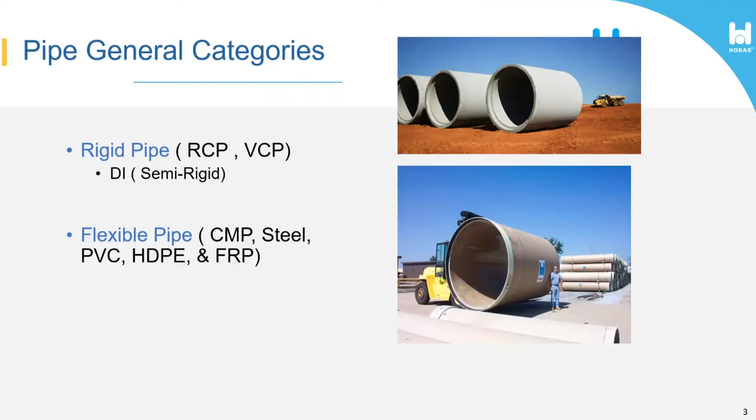It's an interesting concept, what some people think is flexible and what other people think is rigid. I got into a very good discussion with the Corps of Engineers group down in New Orleans when they were welding some 84-inch steel pipe for a pump station, to take all the rainwater and pump it over the levee.

They didn't want to entertain fiberglass pipe because it was flexible. But when you looked at this big 84-inch steel pipe with all these stalls in them that kept the pipe from collapsing on itself, because it was super flexible pipe - it was about an 8 pipe stiffness when you looked at the wall thickness and its modulus. So it was maybe 5 times as flexible as fiberglass was, but they didn't view steel as flexible, and they viewed fiberglass pipe as flexible. It's still an issue working with the Corps of Engineers in New Orleans.

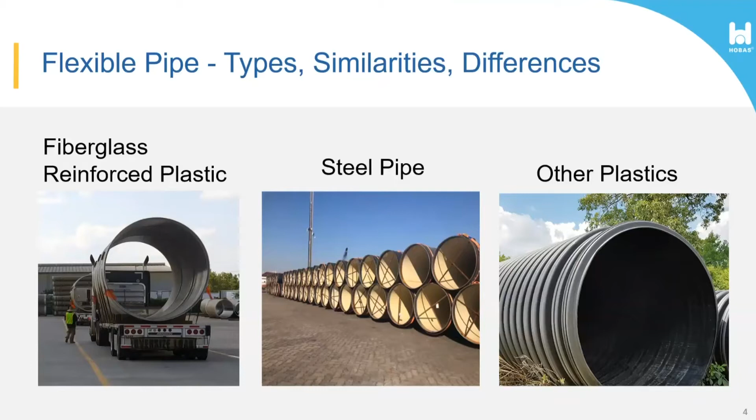But that's just what we want to address. There's all types of pipe, but the installation practices and how the pipe itself performs are unique to themselves.

Kim's going to touch a lot about what we do to understand our pipe in such a way that we can help you install it correctly and understand what affects our pipe, what you do in the field, what design engineers can do that affect the overall installation, and how we can address this as a team to get a successful result of the project for everybody involved.

We're going to talk a little bit about the intended use of flexible pipes, the different installation methods, because they do have different criteria that need to be addressed. And it all starts with proper pipe design.

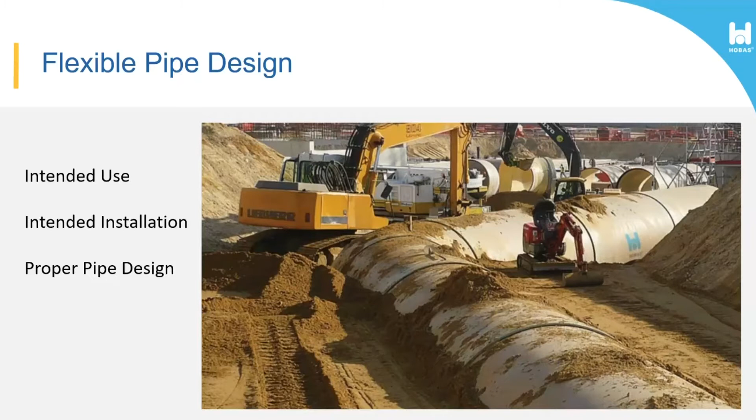Is the pipe designed to do what you're trying to do with it in the field, or can it be modified for what you're trying to do with it in the field based on depth, based on soil types, based on the equipment they're using to put it in the ground? All those things we're going to touch base on, and they all revolve back to: if the pipe is designed correctly and it's installed per that design, then you're going to have a good result.

And that's where Kim's going to come in and talk about all the governing regulations that help us as a pipe manufacturer, and the owner and the design engineer, understand more about the pipe and what should and shouldn't be done with it. So Kim, if you'll take over from here, I'll keep forwarding on.

Sure, great. Thank you, John. I'm going to cover the next section regarding standards, pipe performance, and testing.

As John and Joe said, my background is in fiberglass pipes with 30 years experience relating to product design and performance. And although I'm referring to fiberglass a lot in this example, flexible conduit theory is applicable to a wide range of non-rigid products.

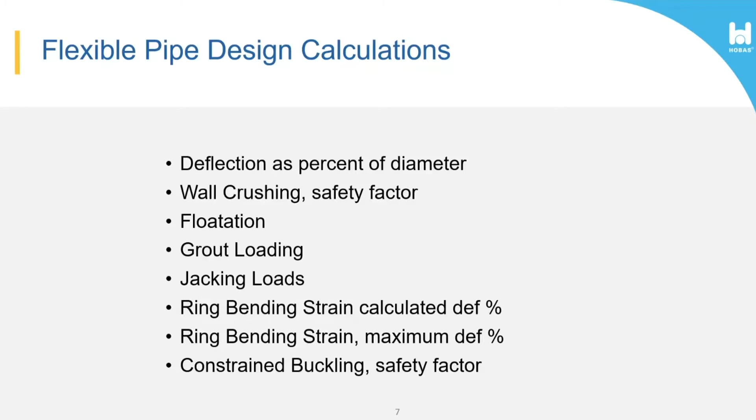This looks a little bit complicated, but this deflection is the chief area of concern for most owners and engineers and obviously contractors during installation. And this depends on the pipe's stiffness. However, how the pipe stiffness affects product performance is very often misunderstood. If a pipe is over deflected in the field, and I mean any flexible pipe, whether it's fiberglass, PVC, or HDPE, the first question is not what's the pipe stiffness, but what's the support provided to the pipe.

So let me explain that a little bit more. When the pipe is installed in the ground, all flexible pipes undergo deflection, and the amount of deflection is a function of a lot of things: the soil load, the live load, the native soil characteristics of the pipe zone, the embedment materials and their compacted density, the trench width, haunching, all of these things, including the pipe stiffness.

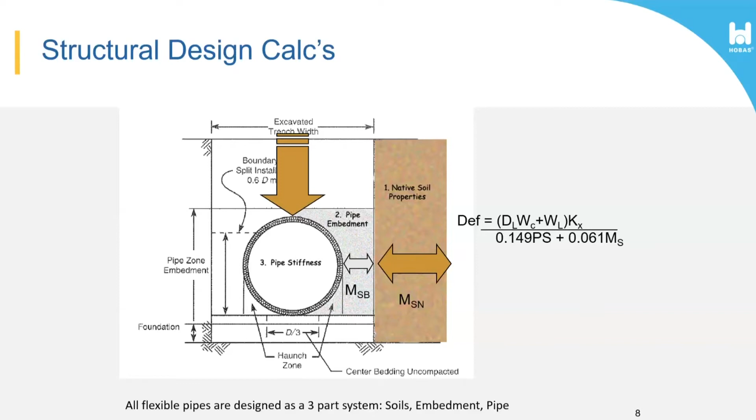So again, the formula for deflection has two factors in this denominator, one being pipe stiffness and the other combined modulus. For our typical installation, the pipe stiffness times its factor ranges from about 3 to 11. So this 0.149 times pipe stiffness gets you these ranges you see here: 18, 36, 46, 72, which gives you this factor of 3, 5, 7, or 11. That's the contribution to this bottom portion of the denominator by the pipe.

This right chart is showing you the contribution from the soil modulus. So depending on the installation type, the soil conditions you have, how many blows per foot in the case of granular materials, you have a corresponding modulus, M sub S, and this factor, 0.061 times M sub S, gives you values that range from about 3 to 180. So the magnitude of the soil component is far greater than the magnitude of pipe stiffness. This means that increasing the pipe stiffness to combat deflection is not as effective as improving the embedment.

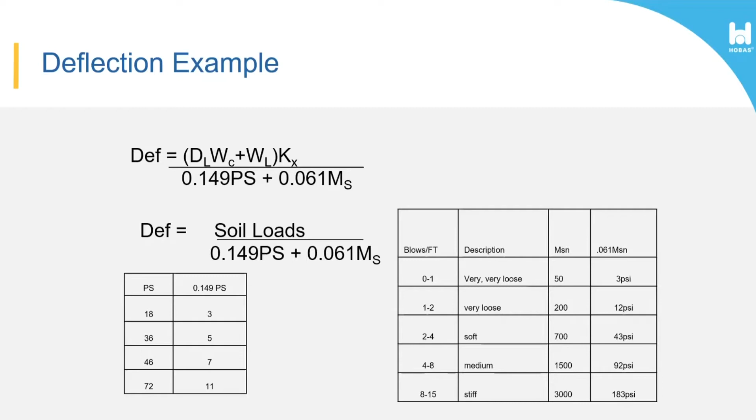And we get this a lot. If we see installations that have deflections a little higher than we had predicted, they say, well, can we just make the pipe stiffer? Not really. The most effective way to correct this installation is to increase the embedment. Go ahead to the next slide, John.

So there are lots of other calculations that are verified as well. Flexible pipes are checked for all of these performance criteria, and appropriate safety factors are applied. In addition to deflection, we check wall crushing, buckling resistance, and then when the pipe does deflect, it causes strain in the pipe wall. This is something I'm going to talk more about later in upcoming slides regarding particularly the behavior of this strain on the product.

So in order for a pipe manufacturer to accurately predict the performance of the pipe, information about the actual installation is crucial. This includes cover depth, location of the water table, any other loads applied like live loads, and the support to the pipe. In a direct bury application, this would be the combined soil modulus, which is the combined support produced by both the native and embedment materials.

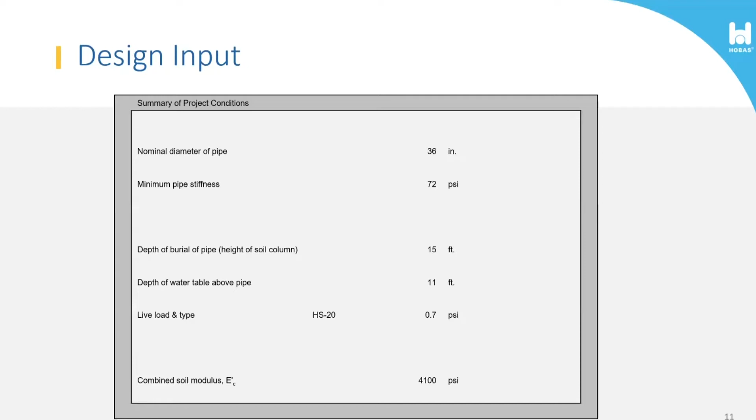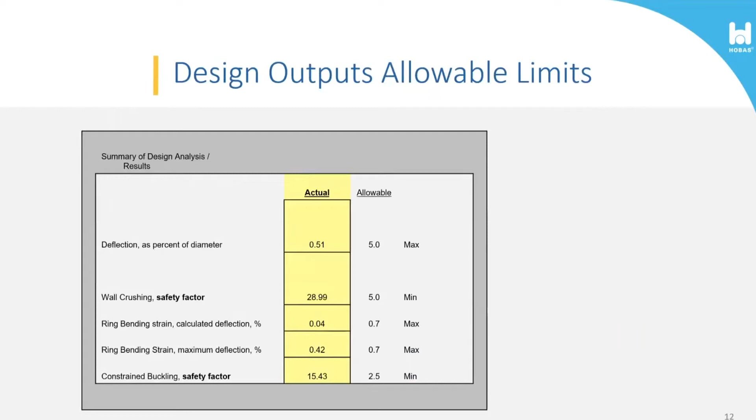And then the predicted reaction can be compared to the allowable limits. Here is a summary of an analysis with the predicted performance versus the allowable limits.

And this is a stiffness test. The pipe production is sampled and tested in accordance with ASTM standards, and we perform a variety of tests depending on the application. Test results are always available from us, including stiffness and deflection characteristics, as well as mechanical properties such as tensile or compression.

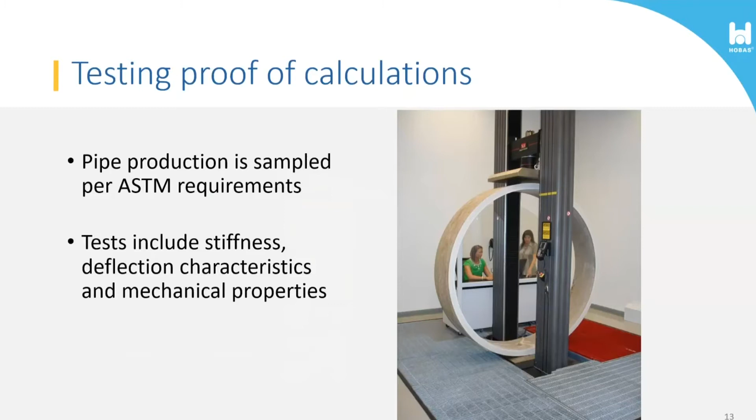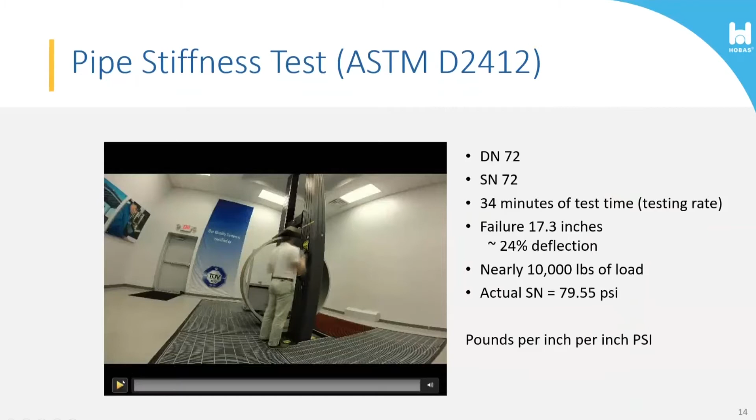On the next slide, we have a short clip of an actual stiffness test. This particular test, a 72-inch pipe stiffness test, would take about half an hour, so we sped it up to complete in about 30 seconds. In about 20 seconds in, you'll see the failure occur on the top portion of the pipe.

Right there, we see the failure. Sorry, clicked the wrong button. That's okay, you can play it one more time so that we can see it.

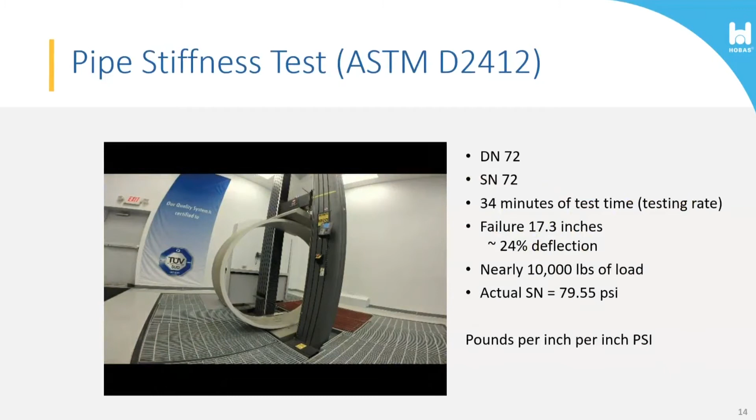In this case, the deflection reached over 24%, which is well in excess of that 5% limit. So you can see this pipe is actually very flexible, even though the total load at failure for this particular pipe was over 10,000 pounds.

As discussed earlier, the load carrying capability of the pipe alone is much less than the combined carrying capability of the pipe-soil system.

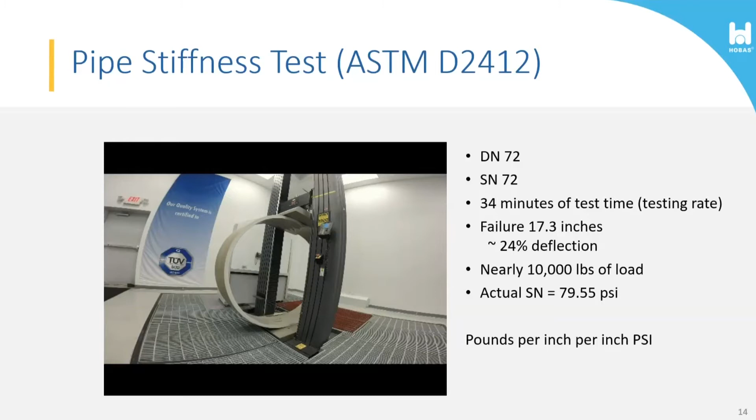It's very important to recognize that for that pipe to deflect in the vertical direction and actually get shorter, it has to get wider. In this test, there's no side support, and the huge difference to what we have in an installed condition in the field is it does have side support. So it can withstand that load without going into a deflected state, based upon how much side support there is on the pipe.

So in addition to the short-term tests like the stiffness test we just saw, many performance limits are determined at extended periods through statistical extrapolation of data obtained from long-term tests under similar conditions.

One test is the ASTM standard for strain corrosion, shown in this picture here. This test was first published by ASTM in 1978, and it requires that a minimum of 18 specimens are set at various strain levels over more than a one-year test duration.

The strain corrosion testing was done per the sanitary sewer specifications in 1 normal sulfuric acid, which mimics a very corrosive sanitary sewer. These accelerated tests continue for a minimum of 10,000 hours per the standard, and this is the basis by which fiberglass pipes have been shown to have a design life of 150 years.

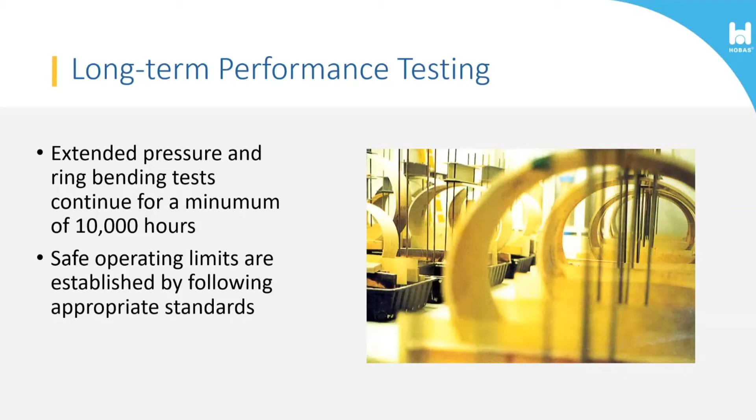Some tests have been running here in Houston in my lab for over 27 years. And globally, we have pipes that have been in this test environment for 40 years.

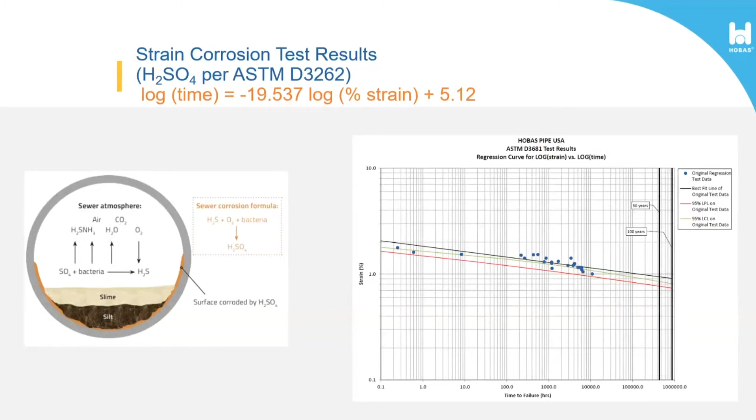Yes. Just to give an introduction as to why flexible pipes are being used more than rigid pipes now, there are other things that have to be considered with installations on flexible pipe. But pipes like PVC, fiberglass, and other plastics are resistant to the things that make pipes deteriorate quickly.

I can't think of hardly any customers still using bare concrete pipe or even lined concrete pipe in sanitary sewer environments, because it just doesn't last very long. So they're willing to incur some additional installation costs for flexible pipe because they get so much more life out of the system. In today's environment, with the economy what it is and budgets what they are, the more life they can get out of a system for the same dollars, or even a few more dollars on bid day, if that system lasts 2, 3, 4 times longer than a conventional system, it's money well spent.

We've enjoyed the marketplace. We're growing along with all the other materials. For those of you trying to find materials to buy and put in the ground, everybody has been slammed with demands to produce more pipe faster and get it to the job site.

I want to talk a little bit about installations. Joe brought up my history - I've loved utility construction for a long time, been in it for a long time. I've seen pipes like those shown on the left installed very shallow, which have their own criteria of concern for loading, flotation, and other things that happen with flexible pipe that shallow. I've seen this pipe and other flexible pipes installed 200-300 feet deep inside tunnels.

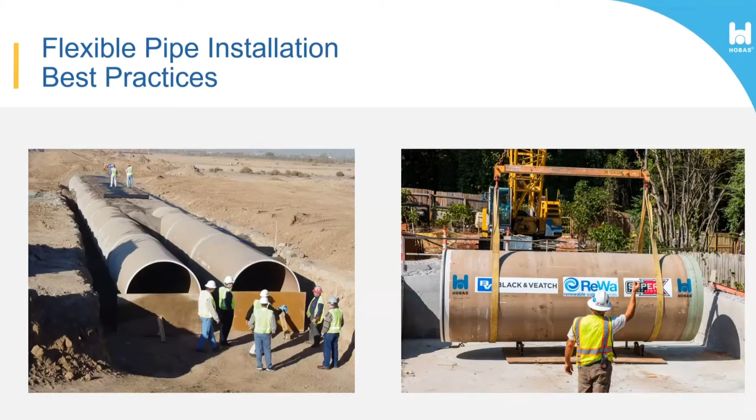I'm going to talk a little bit about inspection when pipe shows up on your job site, what to look for - whether it's ours or anybody else's - how to handle it, how to store it safely, then really getting into the meat of things on direct bury installations themselves, on what really needs to be focused on to assure a good installation.

As time allows, we can get into two-pass tunneling, slip lining, other parts of flexible pipe that are used quite often, but in what we've seen in the industry, maybe 85 or 90% of our business is in direct bury new construction. The rest is split between slip line applications to renew aging infrastructure and direct jack tunnels - that's the method needed to get the pipe in the ground without tearing up everything on top of the ground that's in the way.

So we'll talk a little bit about good practices to put in, the pitfalls you might see that you need to watch out for, some of the damage that could happen to pipe and how to recognize that, hopefully, and to prevent it, or if and when it does happen, how to repair it. Then we'll have some time at the end for questions and answers.

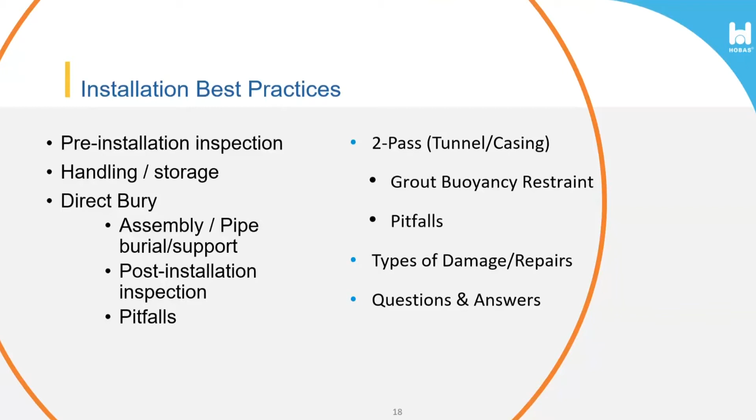So just a brief minute on the transfer of the product. When the manufacturing plant produces a product, it's in our control, it's inspected, it's tested to make sure that it exceeds all the standards it needs to be. For us, if our pipe is stamped 46 stiffness, it's over 46 stiffness, or if it's stamped 155 ton for jacking pipe, it exceeds that by a vast amount, because we don't want to ship anything to your job site that doesn't exceed the requirements for that job site.

So when it leaves our factory and goes on the back of a truck, and that truck driver straps it down, that is literally his pipe at that point.

It's no longer in our control. Whether he's driving 2 hours up to Dallas or 3 days to California, the trucker is in charge of that pipe, and things could happen to it along the way.

We get calls and photographs, not as frequently as we used to, which I think is a good thing. I think truckers are taking more care of the pipe, but if they don't strap it down right—especially like this picture where pipe is on a drop deck trailer—if it's constantly sliding up and hitting that metal deck in front of it, they could damage the end of the pipe. That could cause sealing issues if you don't catch it when it shows up on the job site. Randy Whidden, our field service manager, gave me quite a few slides to talk about what to look for in the field as a contractor building your project.

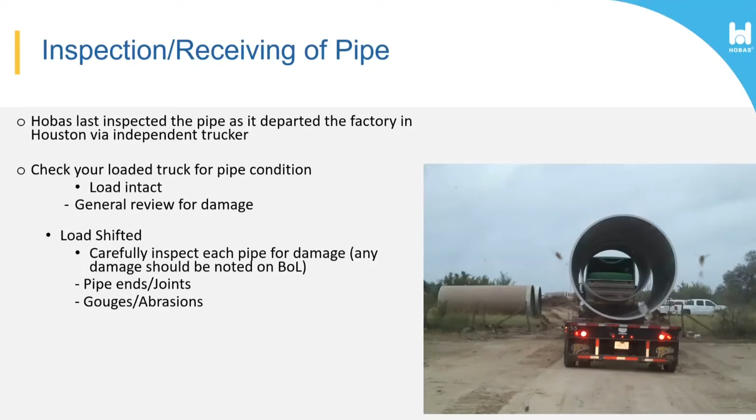Then as you pick it up to install it in the ground, you go, oh, by the way, I forgot to tell you that pipe was damaged when it came off the truck. Then the trucking company starts arguing, well, I don't have anything on my bill of lading, and you probably dropped it, and it just gets into a whole mess that we'd all rather avoid. So just be good stewards of the pipe, because when you take it, it's yours.

So nobody likes to see that. Just be careful with it. Handle it correctly—it is flexible. It's kind of hard to describe, because if you took a section of this pipe and cut it into blocks, you'd swear they were bricks and couldn't bend them, because it's a very, very stiff, flexible pipe. Especially as the walls get bigger, or you get into jacking pipe, but it's still flexible. It's still made of plastic, and it's still reinforced with fiberglass.

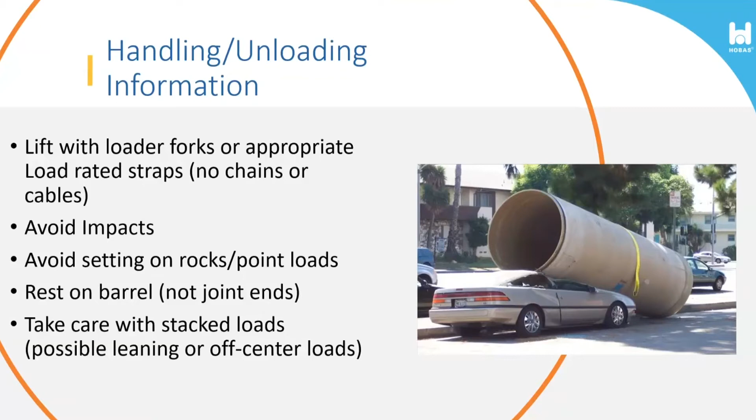I've seen a lot of pictures of job sites where the contractors, as they're excavating the trench, throw some dirt over and make a little mound, one here and one here, and set the pipe on a small mound of dirt, so that there's an airspace in between that allows them to get the straps around the pipe a little bit better.

So just common sense handling and safety issues. I know a lot of you have installed our pipe and other flexible pipes, so this may be old hat, but for those of you that haven't, it just needs a little bit of extra care.

Short-term and long-term storage. Short-term's easy - get it off the truck, get it in the ground as fast as you can, and it's not an issue. Longer-term storage is where you're storing pipe on the ground for 6 months, 12 months, a year or longer.

The exterior of the pipe is resistant to UV damage because it has a sand layer on the outside. But the interior of the pipe is not protected, so we don't want sunshine coming into the end of that pipe for long periods of time, because it will literally sublimate that resin and cause it to evaporate over time. If you've ever seen a fiberglass tank that hasn't been painted, sitting out in the sun for a long time, it gets fuzzy - that's because the sun has been working on that resin, turning it into a gas, and it's evaporated over time, leaving the glass exposed.

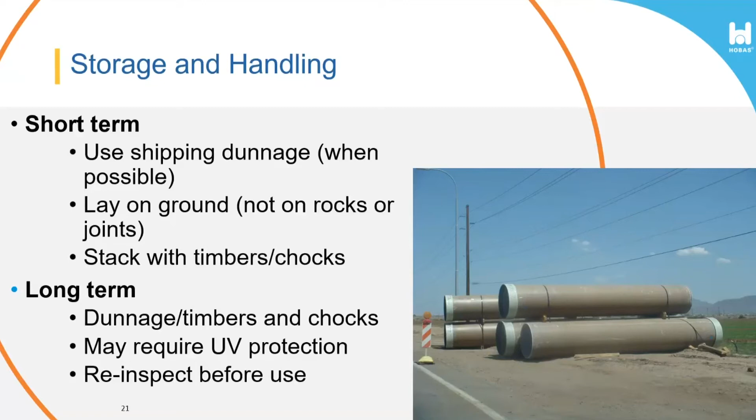And being in Tennessee and Kentucky, I couldn't resist bringing up a little racing.

One of the purposes of this discussion is so that you can understand more about flexible pipe, and that we can understand more about the challenges you see in the field, because we don't want to slow you down. We want you to win the race. We understand that getting pipe in the ground as quickly as possible makes you money.

It's been a few years since I ran a large diameter pipe crew, but I'll say that's 10, 12 years ago. A good sized pipe crew for laying 60-inch pipe was probably costing about $10,000 a day. With inflation, fuel and material costs where they are, that might be $15,000 a day now. So every day you can shave off your installation schedule by doing it right the first time is money in your pocket.

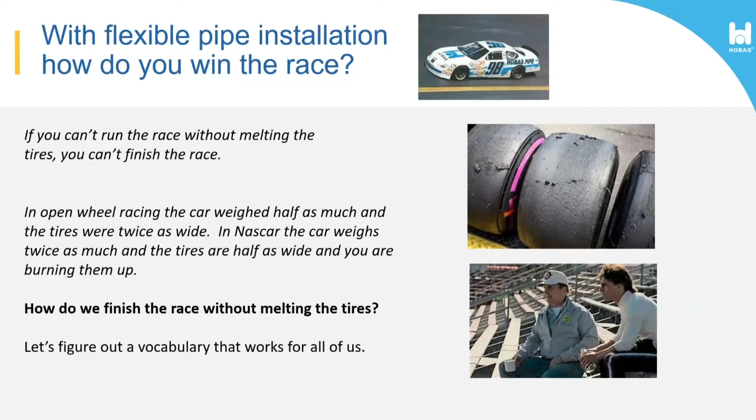And it's all about keeping a tight pipe zone. That's a Rick Turkopp-ism. If you ever asked him about any type of pipe installation that had a deflection issue, he'd always ask about the pipe zone. If you keep a tight pipe zone - and we'll get to that picture Kim brought up a little while ago - it's the area around the pipe that is more impactful on the long-term performance of the product than the stiffness of the pipe itself.

Another thing Rick used to say is he could take an aluminum beer can - he might not have said beer, but I'll say beer - cut the ends off of it and bury it 30 feet deep without it crushing, if you do it right. And doing it right is what we're talking about here in terms of best practices. So keeping the pipe zone tight and compacted is absolutely critical with flexible pipe.

We'll show you some examples of do's and don'ts, things that went well and things that didn't go so well. The other thing you have choices with when using flexible pipe is the embedment material itself - whether you're using cement stabilized sand, plain native sand, pea gravel type rock that's smooth and flows well, or crushed rock that's 3/4 inch, which doesn't flow as well but is a great supporting material.

Whether the material you're putting around the pipe is almost at its compacted density as soon as you dump it out of the bucket, or whether you've got to sit there and beat on it with vibrating plates, sheepsfoot rollers, split wheel rollers, pogo sticks, jumping jacks - there's all kinds of ways to get that material around the pipe compacted.

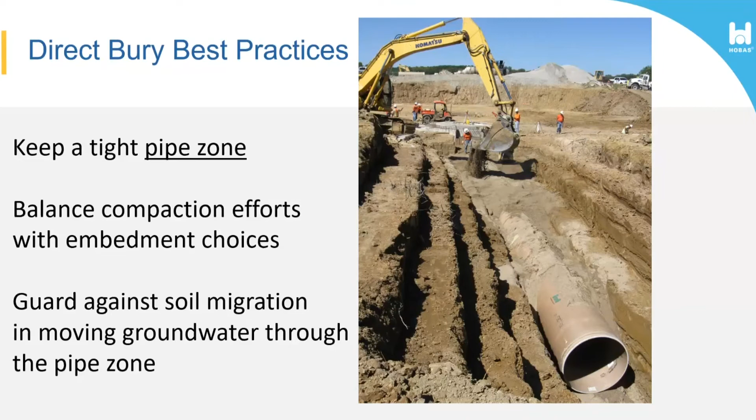I'll use a couple of different examples. If you're cutting through granite and you have a trench that you've either blasted, sawed, or excavated in some other fashion, drilled and blasted, you've got a very good surface for this pipe to push against. And if you dump 3/4 inch crushed rock in there that's probably at 95% of its ultimate density as soon as it hits the bottom of the ditch, that pipe isn't going anywhere.

It's a good pipe that has good embedment material to push against that won't compact. It has a good wall of native soil that it can push against so that it won't over-deflect. This system of the pipe, the embedment, and the native soil will be in equilibrium. The spring, or resistance, from the soil here is much bigger than the spring of the embedment material, which is much bigger than the spring of this pipe trying to dissipate that load.

So things that we can control as a pipe manufacturer are the pipe and the pipe stiffness. The things that are in your control are the type of embedment you use, how you get it in here, and how well it's compacted. And the biggest thing is this interface between these two.

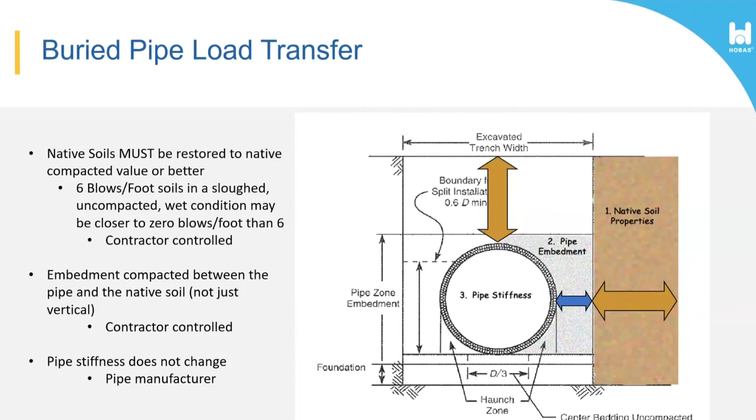And if you don't do that—and this is another Turkopp-ism—if you don't compact the native soil that's sloughed off, or you don't get the material that you put between the pipe and the native soil compacted, the pipe will do it for you over time.

As that picture in the video showed, as that load comes down on the pipe and the pipe sides push out, they will recompact that embedment material and refill the space left by the native material. As it does that, it will find its own equilibrium. But every inch, or every part of an inch, that it moves out is inches that it's deflecting in its vertical state. And we're only allowed 5%, so there's not enough room there to give away needlessly.

The other part about embedment isn't just that it's densified, but the area under the pipe, called the haunches. You can dump material around the sides of the pipe out of a loader bucket, and you'll get a lot that scatters in, but if you've left a void, that's an area where the pipe needs extra support. Pipe stiffness helps bridge some of this inadequate haunching.

But there are some tools you can use quickly, especially with crushed rock or pea gravel type material. Just a concrete vibrator. We've seen contractors with a generator and a small handheld concrete vibrator walk down the sides of the pipe and hit it in 4 or 5 places with vibration, which causes the rock to settle into the voids under the pipe haunches. It takes very little time.

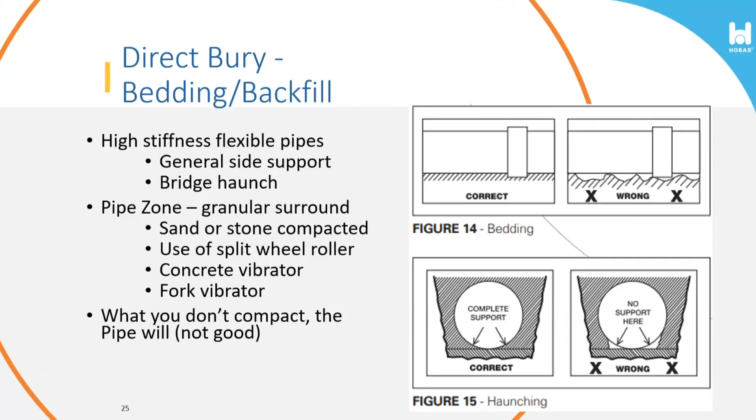Most contractors and operators use a sling to set the pipe in the ground, then bring the bucket down and curl it so the forces against the sling send the pipe home. However, larger diameter pipes take a lot more force to go home, and sometimes you'll need a timber across the end of the pipe to compress the gasket and make a seal. Getting it installed so it seals, doesn't leak effluent into the environment, and doesn't let groundwater into the pipe is the goal.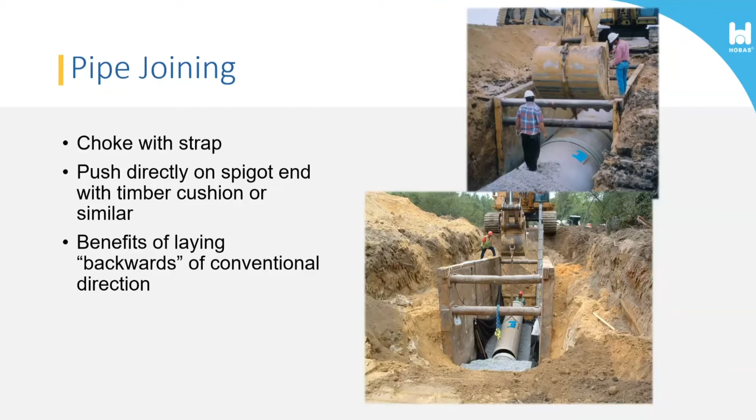Another more obvious than not thing to mention is just keep the gasket material clean. If you've got rocks trapped under the fins and you're trying to put the pipe home, the gasket can't compress like it should, and it'll cause a leak that you'll have to address later. If your crew is trained to clean that gasket out right before they lubricate it, there's actually somebody down in the ditch watching as the pipe goes together, checking to make sure nothing gets knocked in there, or has the authority to stop a pipe from going home if he does see something, and get it fixed. Again, spending a few seconds to get it done right versus having to spend hours and thousands of dollars to go back and address it later is paramount.

And not only with our pipe, but with lots of pipes, sometimes you're laying pipe on a radius curve that has to be deflected once it's put together. This is a different type of deflection, an angular deflection versus deflection from loading. If you've got to turn this pipe 1.5 degrees per joint, you have to put the pipe together straight, and then once it's together straight, you can pull it 1.5 degrees. It's hard to put it together at an angle - it doesn't want to go together that way, and you might damage the gaskets if you try. So as a best practice, leave yourself room in the ditch to put it together straight, then pull each joint over a little bit as needed to go around that angular deflected radius.

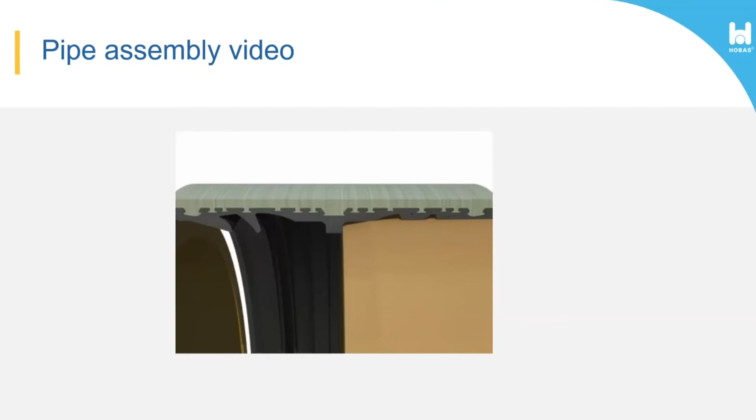They were just laying the fire out of this pipe - they finished the job almost 2 months ahead of schedule. It was supposed to take 8 months to put in; they got it done in 6. I wanted to go out there and see how they were doing it so quickly, and they were actually taking more time, in my opinion, to get ready to put pipe together and cleaning it. They literally had a 5-gallon bucket and a rag, and they were wiping the outside of this pipe off before it went together because it had dust and sand on it. I talked to the superintendent and said, 'Why are you doing that? I've never seen anybody do it.' And he said, 'Well, if that stops me from having to go back and spend a half a day addressing a leak, it's well worth it. We keep the water down there, the guy knows what he's supposed to do, it doesn't take any additional time. He's got time while they're picking the next pipe up or moving the ditch box. We're just taking our time to make sure that everything's done right so that we don't have to address it later.'

One other thing about this type of gasketing system - versus other types of flexible pipes, you can't overbell this pipe. If you're in a tapered bell where the pipe is going together and you push it in too far, because it's tapered, as you're pushing the pipe into something that's not accepting the same diameter, you can split bells and cause leaks. You cannot overbell this pipe simply because of the design of the gasketing system, which will have the pipe pushing end to end against itself versus trying to put any kind of exterior force against the gasket.

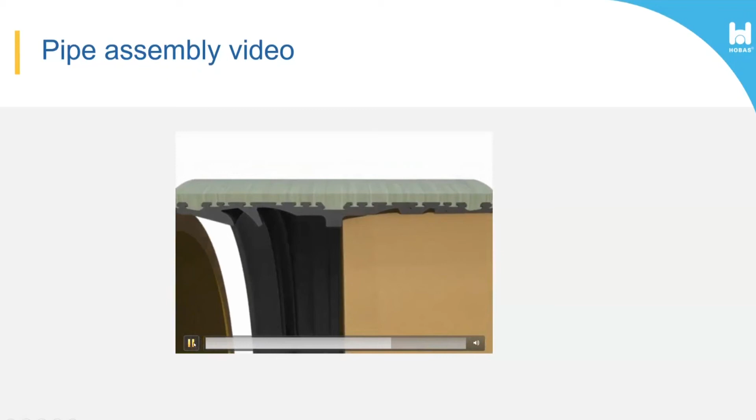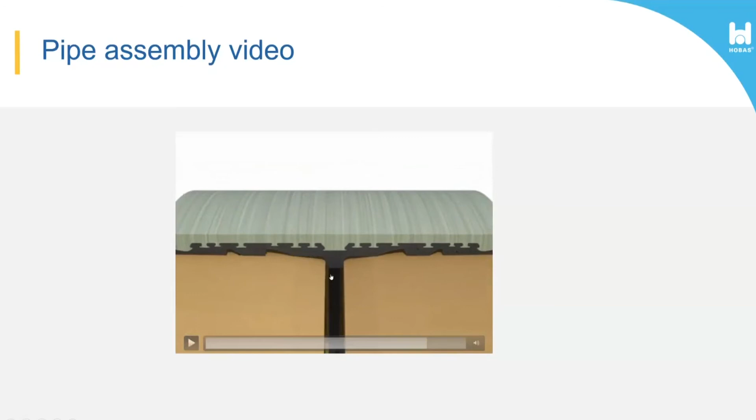Even in the larger diameter pipe, the taper on the end of the pipe is bigger than the center register, so these pipes will butt up to each other. But if you're on the inside of the pipe looking at it as an inspector, an owner, or a contractor, this isn't where the seal is - the seal is back here. So if you see a gap here, you're allowed to have an inch gap, which gets you to about here on either side of the center register. So these pipes could be 2.5 inches apart and still seal because of the gasket that's back here. But if they're touching, you're not hurting anything either, and you can't overbell it - so get it home. They're also marked on the outside; there'll be a black stripe on this end of the pipe, so that when the black stripe gets to the end of the coupling, you know it's pushed home.

Another thing about inspection - let me start that in a more positive sense. Establish very early on, in the first 100 feet of what you're putting in the ground, a practice that's going to work for that soil, that embedment, that pipe.

I've been on a lot of job sites where I've made a gauge stick, gone up to Home Depot and bought a 1.5 inch piece of PVC, put caps on it at 97% or 98% of the pipe's ID. If you can make a gauge stick that's 2% deflected, keep that in the ditch with the guys putting the pipe together and check that pipe.

The one good thing about flexible pipe is it will tell you instantly if you're doing it right - if you're getting the compaction right, if you're getting that density around the sides of it to give it the support it needs. It's instantaneous.

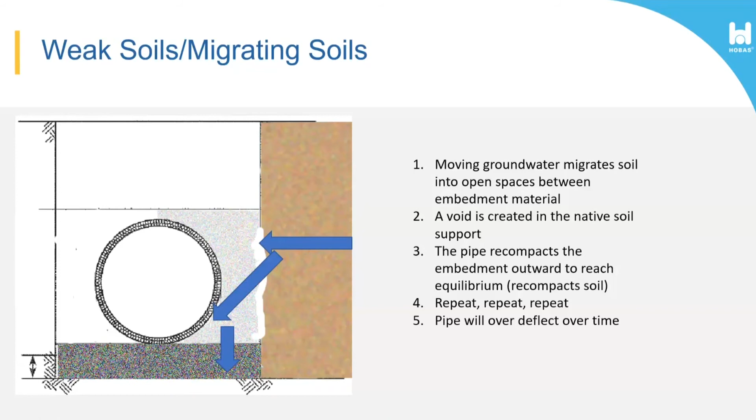And that's easy to avoid, easy to recognize, and this is a great example of a project that had an issue with migrating soils. This was a very long project, over a mile long of 90-inch pipe, and for about 400 feet of it...

We were able to go into the Trinity River's water elevation cycles, they measure all that stuff, to see how often that river came up above the top of this pipe and flooded this place on occasion. Over 11 different flood events, the water was way higher than the top of the pipe, and this sandy area of the project was just a big soda straw that allowed the river to migrate through and run down this gravel, carrying this material with it.

Then the pipe was recompacting that material, and there were 3 or 4 joints of pipe right through here that over-deflected and broke over a 15-year period. This project had zero protection for migrating soils and groundwater.

I take that back. When it was designed, it actually had filter fabric designed around the pipe zone to prevent that. Somebody along the process between when it was designed and when it was bid complained about having to deal with filter fabric, and the owner decided to take the filter fabric out, and they had a failure here.

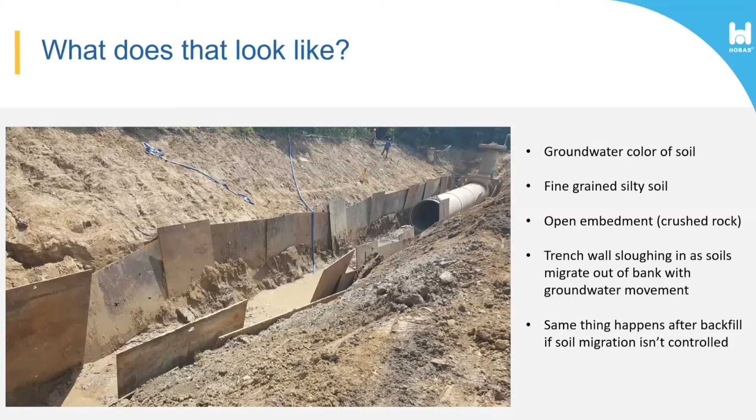Again, it's in everybody's flexible design handbook in terms of what happens as the material leaves, and really the migration can result in a significant loss of pipe support and increasing deflections that could exceed the limits of the pipe. If you don't have that side support because it's left from that groundwater, the pipe is going to over deflect.

It's inevitable, so fixing that with filter fabrics, tight pipe zones, and well compacted material is the way to go. I was going to do the good, the bad, and the ugly, but we didn't have a bad - we had a really ugly one and two good ones.

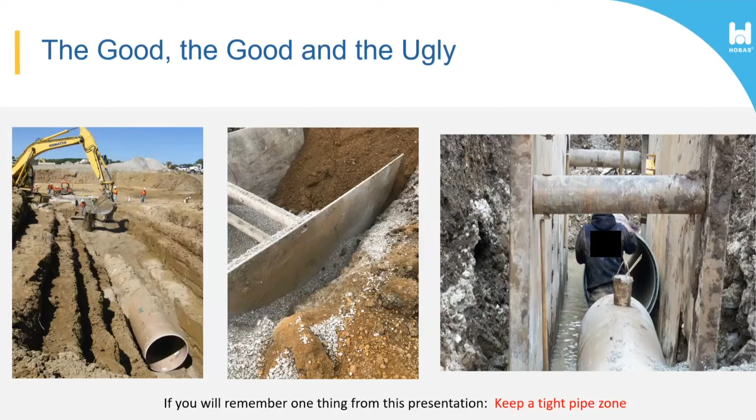They ended up having to come back and relay a lot of this pipe because it was over deflected after 30 days. Because like I said, you load this pipe and it's going to push and push against whatever this material is and recompact all this stuff itself, and you don't want that to happen. You want to keep a nice tight pipe zone. If there's anything you remember out of this presentation over anything else, it's that a tight pipe zone with flexible pipe will save your day.

I think we're okay on time for just a few minutes. I'll go through slip lining real quick.

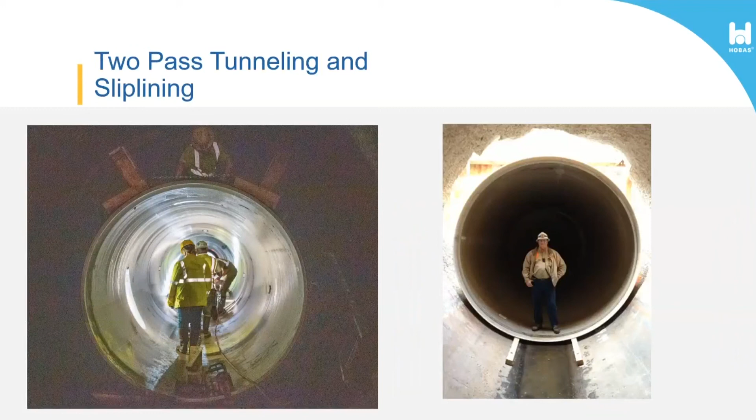Again, with flexible pipe, there's different things you need to take into account. One of those is really just about what will fit through a line. This was a terrible slip line job, and you can see a multiple S curve where the pipe's coming in this direction, then turns and goes this direction, then turns and goes back, then turns and goes another way.

There's ways to slip line and use different pipe lengths and installation techniques to get pipes through hosts that look like this, or hosts that look long and straight.

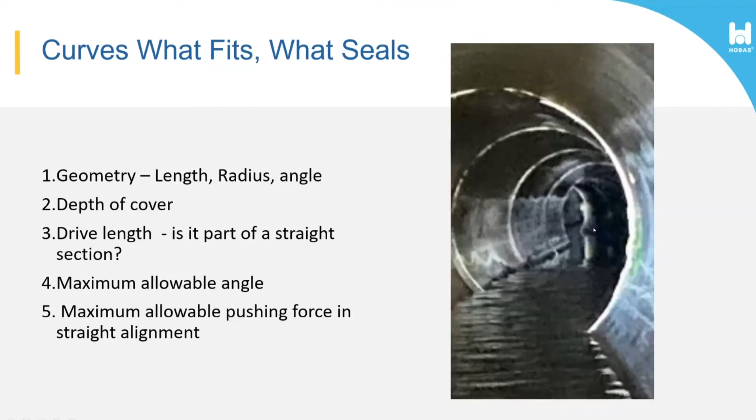You want to use, excuse my high school math here, but I was taking notes from a lesson Rick was giving me when I first started, and I thought it was so important I wrote it down and I've carried it with me ever since. If you've got a curve that has a given radius and a given length, it's very simple high school math to figure the geometry of the longest piece of pipe you can get through that curve.

Really it's the biggest box you can put in there, touching here at the midpoint and touching at these points. It's just basic math to figure out how long this is - can I get a 20-foot joint of pipe through there? Can I get a 30-foot joint of pipe through there?

You take the OD of the pipe plus whatever safety factor you want, whether that's an inch, half an inch, or 4 inches, whatever you're comfortable with. That's the width of your box. Then what you're going to solve for in this equation is the length of that box. It's just simple math.

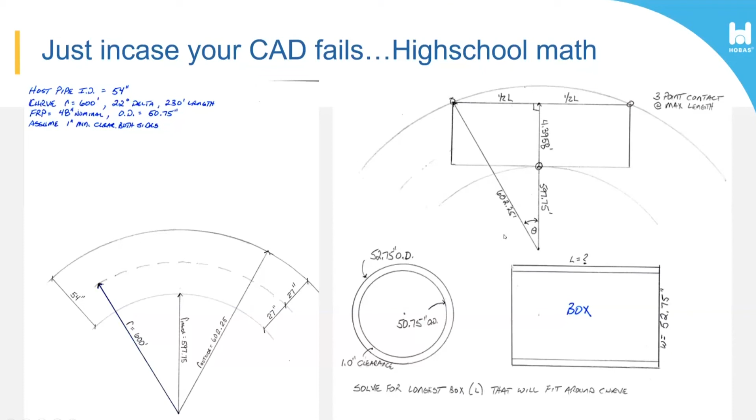It's trying to figure out what that angle is, and then you can solve for half the length of the box. In this example, half the length was 11.2 feet. So that means I could get a 22-foot joint of pipe through that radius curve with 1 inch of clearance on both corners and this point, which means a 20-foot joint will fit through there. That isn't the end of the calculations, because you also need to know whether that 20-foot joint of pipe will seal against the next joint coming up against it.

In this example, the curve length was 230 feet and had 22 degrees of turn from start to finish. If the pipe you're using had 1 degree maximum deflection per joint, that means I could use no more than 22 joints in this section, which means they have to be less than 10.45 feet in length for them to be able to seal. So even though I could get a 22-foot joint of pipe through there, I could only use 10-foot joints to get them through and also have a good seal so they don't leak.

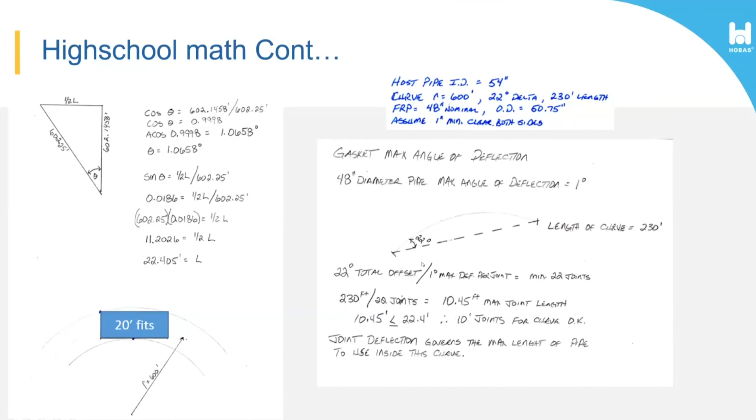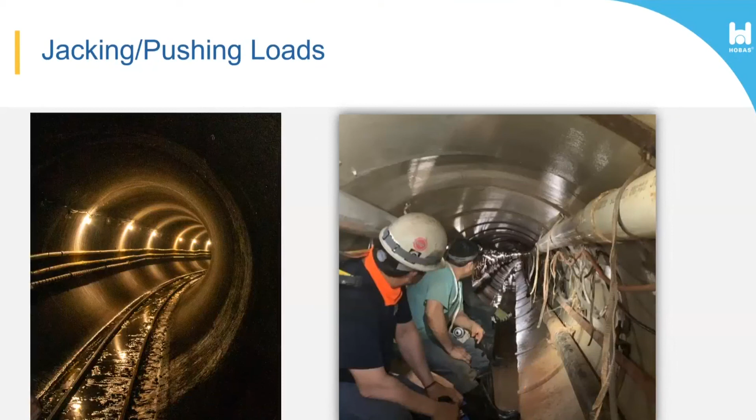We do a lot of pipes and curves, tunneling, slip lining. Flexible pipe is a great conduit here, again, because of its long-term resistance to corrosion and its leak-free nature. Flexible pipe can be designed differently by application.

A lot of people think of flexible pipe as something that's not very strong, but in jacking applications for fiberglass pipe, you can beef this wall up, and these are the safe jacking loads in tons that you can apply to that pipe without it failing. They go into the thousands of tons. So even though it is a flexible pipe, it doesn't flex by much.

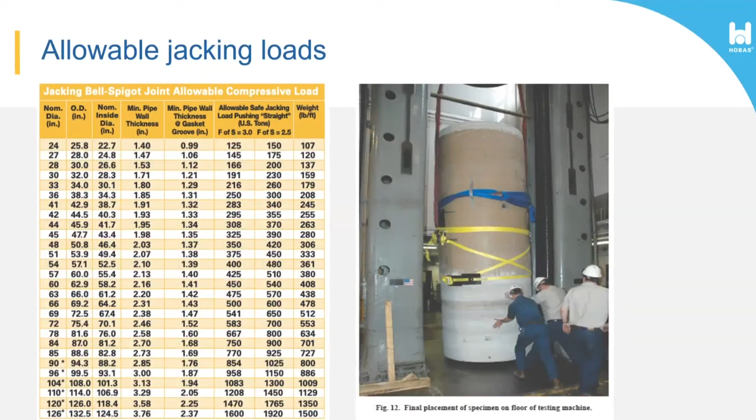We want to know where that pipe's going to fail. Again, I said earlier that we don't ship anything out of the plant that doesn't exceed its capacity. We love failing pipe in the lab. We don't want to see any pipe fail on the job site.

For slip lining and jacking loads - and this is probably going to end up being another discussion for a later time, we'd like to do one of these on slip lining and jacking - if you're pushing one pipe against the other, the tonnage shown for any pipe is considering that pipe is in full face contact, meaning the pipe is touching the next pipe evenly. This whole circle is in contact.

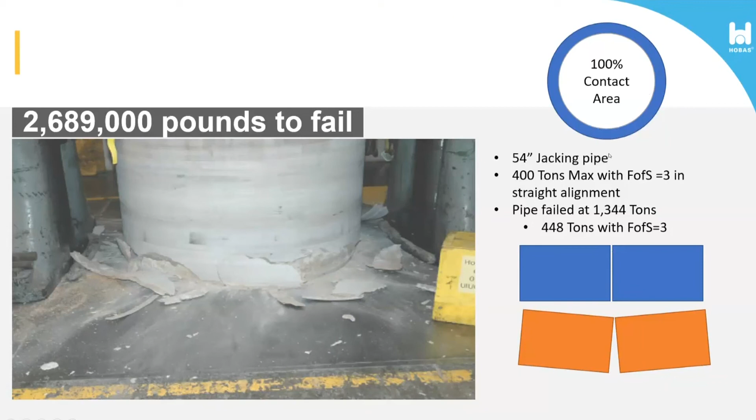If you're cutting this contact area in half, that means the allowable tonnage is cut in half. Or if you've only got 10% of the pipe touching each other, then you really only have 10% of the allowable load.

In terms of installing pipe in a slip line application or a tunnel, there are lots of different things you can do as a contractor with intermediate jack stations—pulling pipes in one at a time, carrying them in, or pulling them with a cable in a string of three, then going back for the next three. This reduces the load on those pipes, matching your installation practices to the capabilities of the pipe. You don't want to exceed their capacity to take that load, because you've reduced the surface area going around a curve.

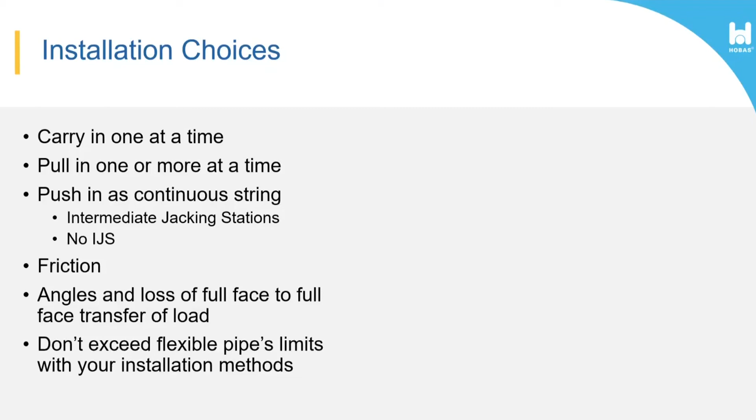We can help with these. We can show you examples of a lot of contractors and what they've done. There are a lot of different things to look at.

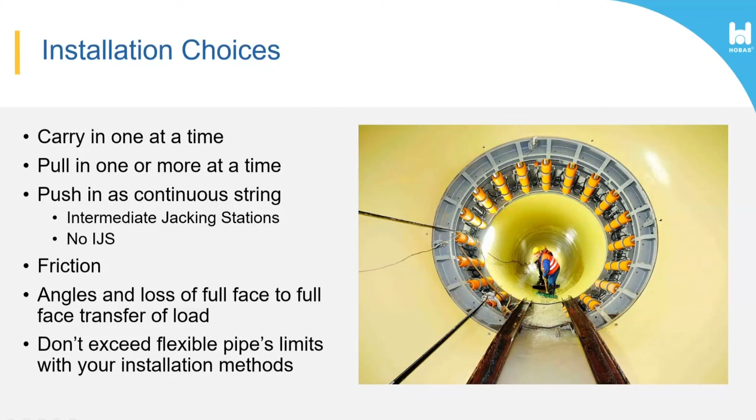These intermediate jacking stations are a marvel. Back when I was doing this 30 years ago, we still used intermediate jacking stations for long tunnel runs, just because we didn't have enough rams in the back of the pit to push a very long string of pipe. So we had intermediate stations that pushed the pipe in an inchworm fashion, then retracted those jacks, and the ones behind would push, and so forth.

Things about blocking—I'll skip through these and get to the questions, because we are just about out of time.

I don't want anybody to be afraid of flexible pipe. Again, it's just like the tires in racing. The tires are soft because they provide better performance and better grip. But if you don't take into account that you're working with a softer tire to get that better grip and performance, you can damage the tires inadvertently.

So with the right kind of practice, the right kind of assistance, and the right kind of care, you can get a very successful, very fast installation process with zero leaks and zero over-deflection—giving the owner what they want, getting you off the job site faster, and saving you time and money by getting the installation done right the first time.

I hope we've addressed that. And if we haven't—if you've got something I haven't talked about, or something you want to throw the flag on and say you don't believe—now's the time to do it. So, George, if you've got a list of questions...

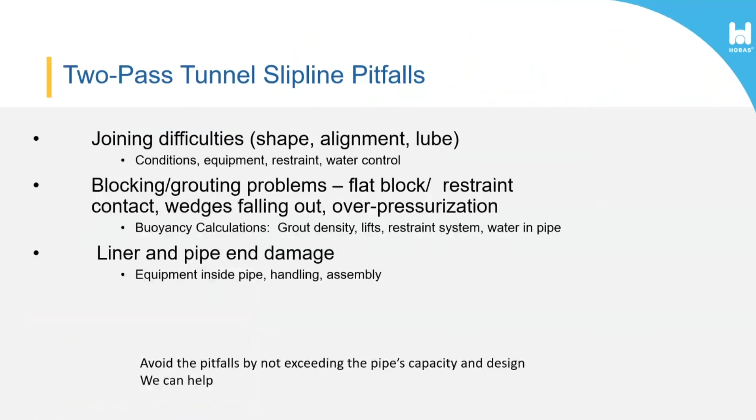Sure, my question is about air testing. What is the recommendation on air testing? Would you test each joint, or what are your thoughts about air testing? Great question.

I like testing each joint, because flexible pipe isn't going to leak through the pipe wall itself. If there's going to be a leak, it's going to be at a joint. So testing the joints is going to be the way to identify a leaking spot, especially with air.

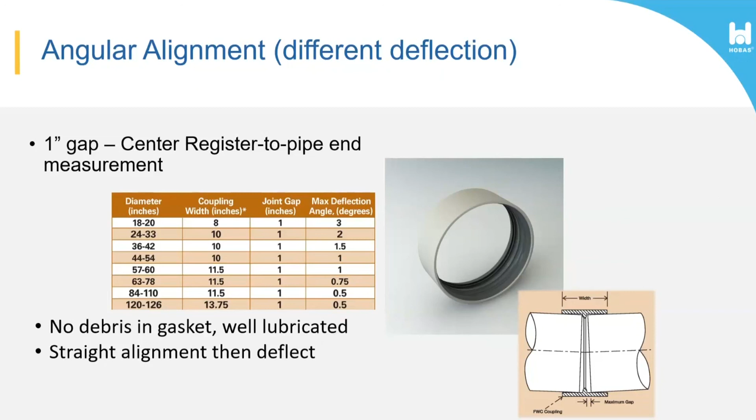I was trying to bring up this picture of the gasket. A very low pressure air test will show a leak better than a high pressure air test, and let me explain that. If I can get this video to play and stop it, hopefully it'll graphically make sense.

The more pressure you put on an air tester, the more pressure you're going to put on the gasket to make a seal. Let me try this again—keep it here so it doesn't move.

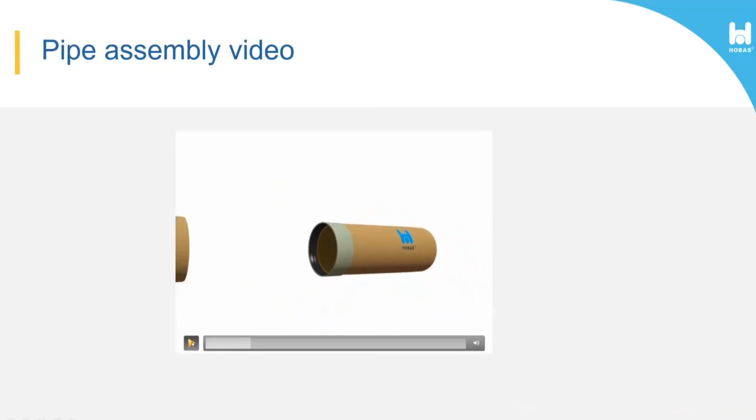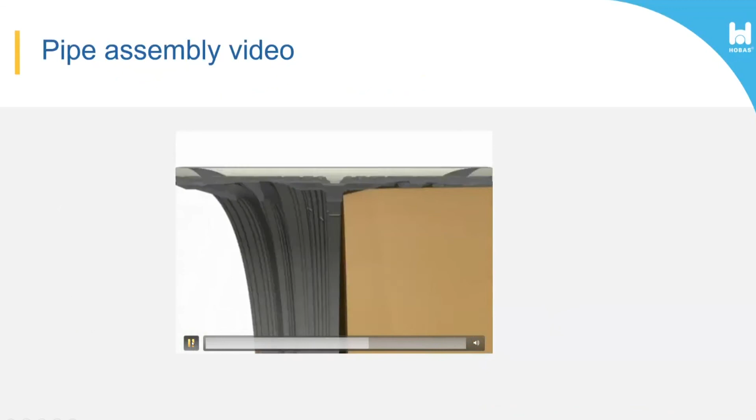So we recommend a 5 psi test. Some owners recommend a 3 psi test to see if the gasket will seal. What happens is you have a joint tester spanning across the pipes when they're together, and you're injecting air into these voids against this fin. The more air you push into that joint tester, the tighter this gasket is going to push against the pipe.

So if you did a 50 psi air test, you're pushing the heck out of these gaskets, making a very tight seal that's probably not going to leak. Even if there's a big rock or something underneath, you could literally push that gasket around the rock and stop the leak by using too much air to test against.

If you're using 5 psi, that's not a whole lot of pressure, but if there's a leak, if this gasket didn't get compressed because there's something behind it or debris, it will show up in a very low air pressure test.

I don't like testing from pipe segment to segment, or manhole to manhole, because if you do find a leak, what are you going to do next? You're going to stop and test each individual joint to see which one was leaking. Just do that the first time.

5 psi in a larger diameter pipe is tons of force, a lot of square inches on the end of a 96 or 120 inch pipe. When you put 5 or 10 psi in there, or sometimes the owner wants as much air pressure on the inside as there is groundwater on the outside, it gets dangerous to get inside there with a plug.

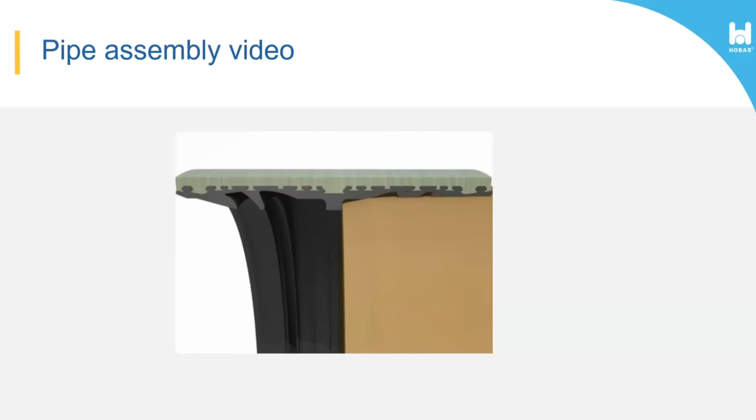I'm wondering, what are the biggest challenges to installing flexible pipe that the industry needs to get behind? What can the industry do as a whole to get behind this?

I'm trying to lobby for more owners to understand there's a difference between what's shown on the plans and what's seen in the field. A lot of owners say, here's the plans, you've looked at the job site for an hour, so you absolutely know everything you're going to need to know, which is impossible and laughable. Even design engineers who worked on the job for a year or two know more about the job site than the contractors bidding the work.

So I'm lobbying for contractors and owners to come to a more flexible understanding of addressing issues in the field. If you come into a situation where it's obvious you need to do something different, you should be able to do that quickly. Whether it's contingency items built into the job up front, or increased amounts of crushed rock if you get into a particularly wet environment, things that make it easier for the contractor to address issues that usually come up but aren't covered in the plans and specs.

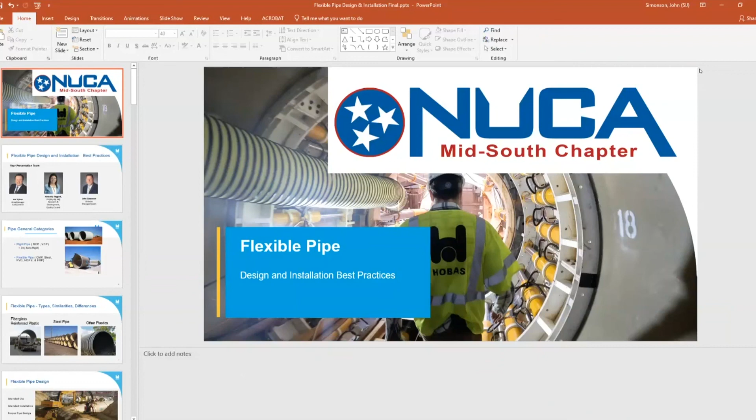I'll throw one out there, John. Can you touch on another importance that we're seeing less and less of when plans are made and jobs are ready to bid? We're seeing less geotech reports. What's the importance of knowing what we're putting the pipe in?

As a contractor, it's vital, and there's two different camps of thought here. We work closely with design engineers and owners as well as contractors. Owners don't want to get caught by surprise. They don't want to bid a job assuming it's all nice, good ground, then find out 30% of the job is just crap because the test sample didn't pick up that landfill nobody knew about, or that pocket of silty clay. But it doesn't do any good as an owner to ignore that either. You can never do enough soil testing in advance. If you test every 1,000 feet, there's 1,000 feet you don't know about between the two. If you test every 100 feet, there's 100 feet between them you don't know about.

As a tunnel contractor, I've tunneled into old railroad pilings. Nobody knew there was a railroad through there 100 years ago. When they took the railroad out and the berms out, they left the trestles in there and just backfilled them, and then we had to tunnel through them.